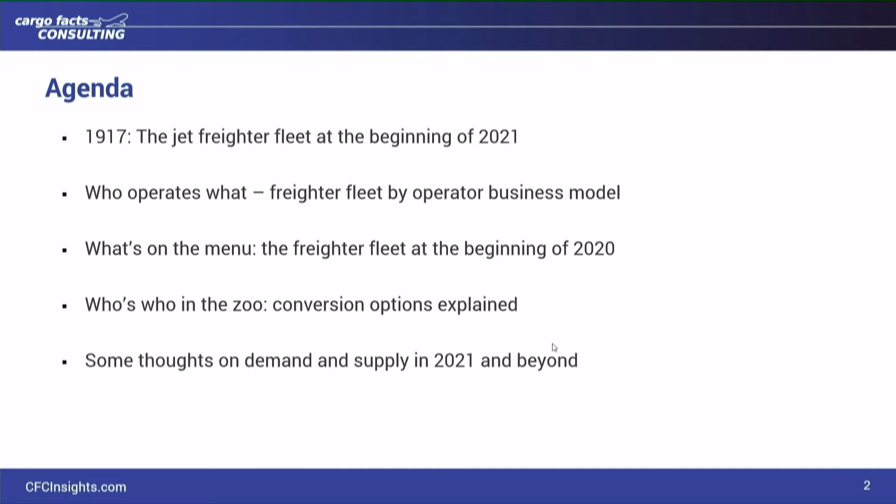Availability of freighters, so welcome everyone. I'd like to talk about a few things today. First, give you a rundown of where we stand with the jet freighter fleet at the beginning of 2021. 1917 is the magic number of aircraft in service, at least by our count. Then looking at who operates what in which segments, because this is quite key with regard to the whole demand-supply balance issue. Then, what's on the menu, the freighter fleet choices we have going forward. Who's who in the zoo, conversion options explained, and some thoughts on demand and supply in 2021 and beyond.

In 2020, the total active narrow-body fleet grew by about 5%, while the medium wide-body fleet grew by about 4%. Large wide bodies, by our count, grew about 3%. And we're in a situation where the number of retirements for a number of years now is at a historical low, and the parked fleet is also at a historical low.

So in the narrow body category, we count about 710 aircraft. The biggest change there is that we're seeing more 737 NGs come onto the market. We've seen some extra classic deliveries, extra 757 deliveries, and starting to see some retirements of other types, and also some more MD-80s in there as well. On the medium wide body side, really the biggest growth has been on the 767 side.

Both in factory-built freighters, mainly going to FedEx and UPS, as well as in conversions going to ATSG, Amazon and co. On the large wide body side, the big changes have been extra 777 deliveries and a bit of a trickle of a few extra 747-8s.

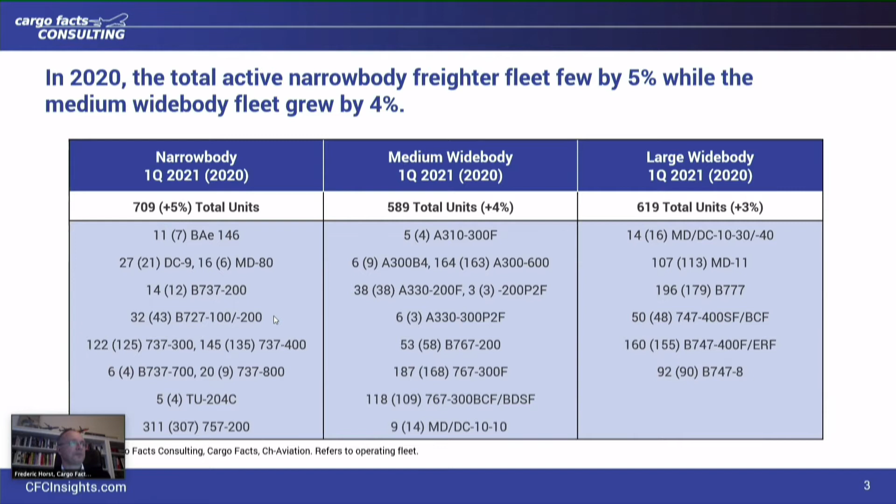Within each one of the segments, and I include the feeder segment here as well, ATRs and so on, but the focus of this is going to be mainly on the jet segment. What we see in the narrow body and the medium wide body segment, most of the fleet is either operating for or is operated by integrated carriers. In the large wide body segment, which is the home of most of the intercontinental freighter fleet, it's much more diverse. We've got combination carriers, scheduled all-cargo carriers, ACMI specialist carriers operating for integrators but also for others, and the express operators themselves. This is quite key when we think about the demand dynamics in each of these segments, particularly the narrow body, medium wide body, and feeder segment.

Traditionally, we've only got a handful of customers in there. So FedEx, UPS, DHL, increasingly Amazon, SF Express, and a number of other smaller express operators and postal operators in there.

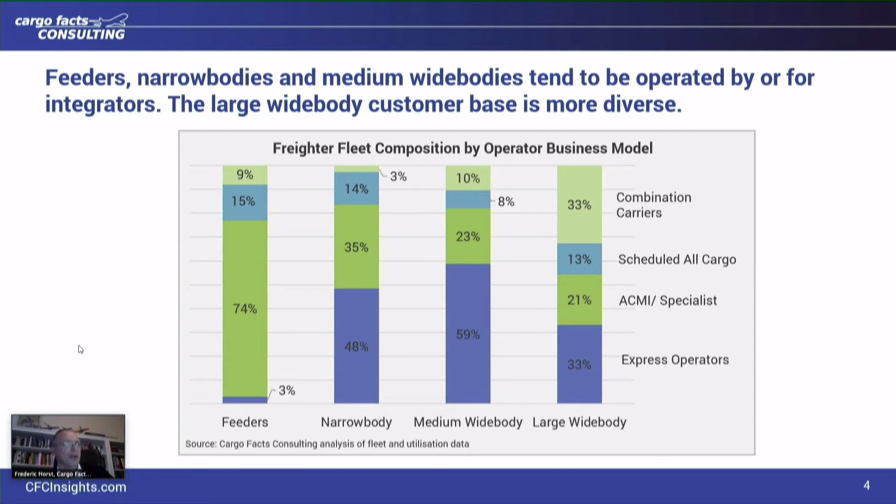So the freighter decision tree. If you're out for a freighter, unfortunately the used car lot is pretty empty unless you want a DC-10 or an L1011 or want to reactivate something like that. And everybody wants a freighter at the moment.

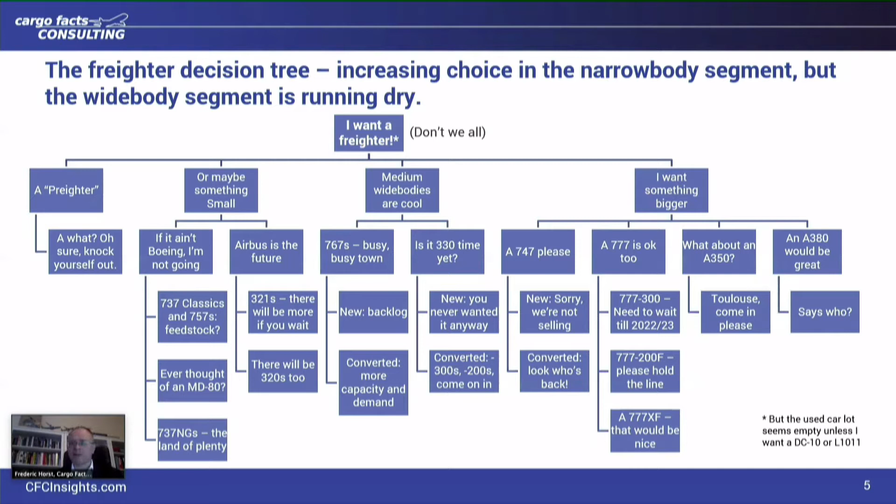2020 brought us a new type of freighter, the Preighter. A what? Well, a passenger aircraft that's operating as a freighter, and we've seen a number of airlines, traditionally freighter haters, without any freighters, starting to operate passenger freighters. Everybody seems to be doing it. I haven't quite figured out the economics, but...

What I do know is that if someone else is paying the costs, be it the aircraft expenses or lease expenses, then these aircraft can make a decent amount of money. Particularly in the peak of the pandemic, where rates were sky high, it was actually possible to make some money with passenger freighters. That being said, there's still quite a few in operation on a lot of major lanes. We see anywhere between 150 and 200 flights a week that are operating on passenger freighters at the moment. But if you want one, sure, go ahead, knock yourself out.

Maybe you want something smaller. And there, the choice is really, is it Boeing or is it Airbus? Well, if your choice is, if it ain't Boeing, I'm not going, you can go for 737 Classics and 757s. Not a lot of feedstock left. Maybe 1 or 2 years left in terms of feedstock for those programs.

Have you ever thought of getting an MD-80? Traditionally, I thought the only MD-80 customers were going to be the likes of Everts and Aeronaves and USA Jet that are replacing their old DC-9s, but with feedstock close to zero on those aircraft and a pretty reasonable conversion cost, all up just north of 3 million can get you a freighter on the ramp. So that can be quite an attractive proposition, and I'm sure Bob will talk a bit more about that after.

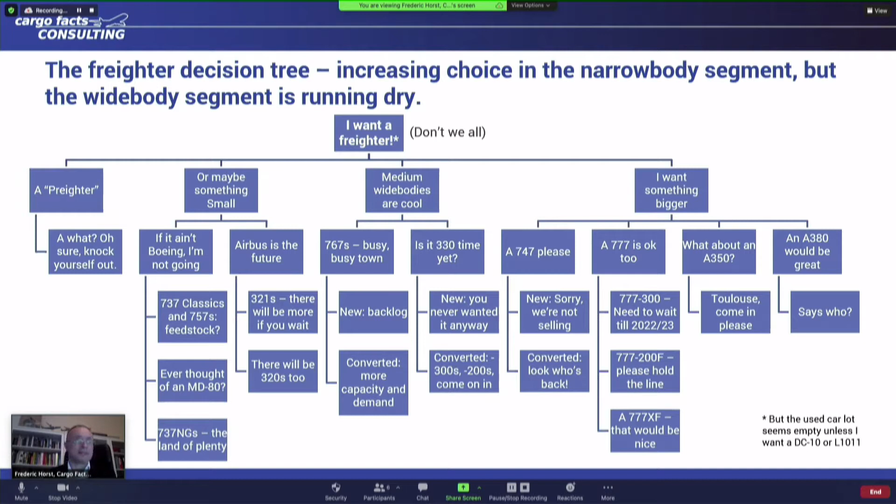So this is, to get a bit more serious, this is an overview of the current and planned conversion options. What we are seeing is that there is a lot of choice in the narrow body segment, but the STC approval dates seem to keep shifting to the right on Airbus narrow body programs. So we've got options on the classics with AEI, IAI, and PEMCO, and also on the 757 with ST and Precision. And we've got some new A320, 321 options emerging.

The only current STC at the moment is the EFW one. The 321 Precision one shouldn't be too far behind, and it's a bit of a question what's going to happen with Sine Draco and C3. On the 767, we've got the choice between Boeing and IAI. On the 330, the choice is currently only EFW, but IAI is obviously planning a program there as well.

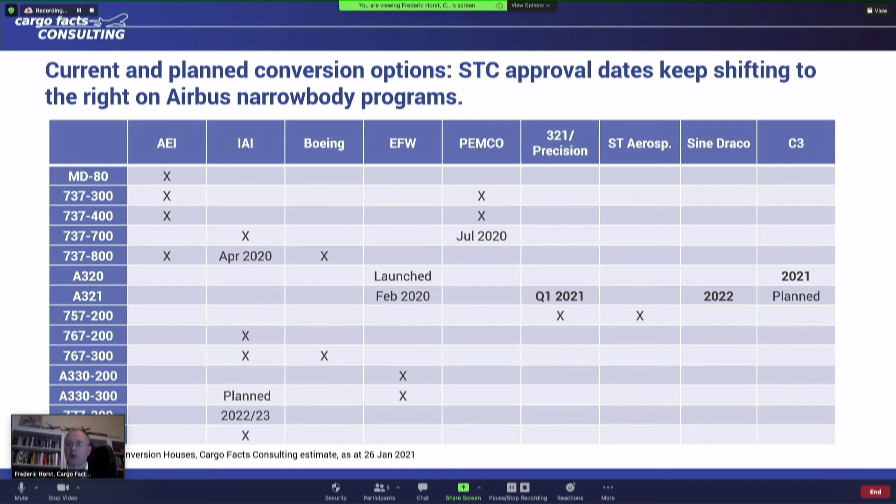The first new large wide-body conversion program will be for the 777-300 ER, expected to receive its STC in 2022, 2023, around that time. And funnily enough, we're seeing a few stragglers on the 747-400 program there, although the last redeliveries were a few years back on that. So the key questions, and this is my last slide.

The key questions going into 2021, in our view, and beyond for that matter, is really this whole demand-supply imbalance. On the narrow body and medium wide body side, the question is whether the underlying demand for freighters has actually been brought forward by a surge in express and e-commerce demand in 2020, or are we going to fall off the cliff? And in that context, are asset owners, particularly leasing companies, getting over eager with regard to the 737-800 and even the 767 without the underlying medium-term market demand to support this?

The other question is: is there too much supply overall in the market, and who's at most risk of getting burned? Airlines, lessors, or conversion houses? On the large wide-body side, the key question there is how long will the gap between large wide-body supply and demand persist? And that's really a question of how quickly will passenger traffic come back and belly capacity, and how quickly will world trade reach normal levels.

All right, thank you.

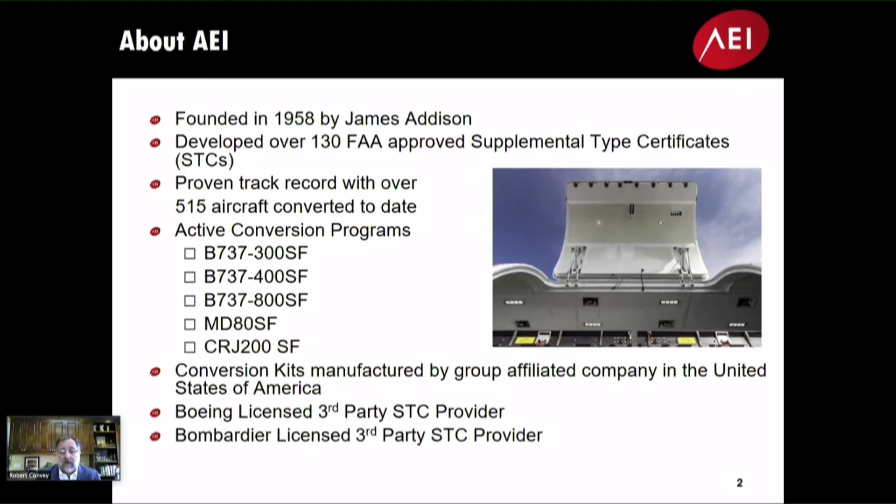AEI, we manufacture our own kits, and I will touch on this because this is becoming an issue. We are seeing, the longer this pandemic continues, an impact on our production. So it's affecting odd things - castings, extrusions - at different times. Sometimes they come back in and they catch up. Other times they're permanently disabled. Companies like Ancra, who provide our cargo handling system, are seeing greater and greater lead times. And again, they're being affected by their suppliers with castings, extrusions, machining. And I'll touch again, we are a Boeing licensed and actually a Bombardier/Mitsubishi licensed provider for the CRJ.

Just kind of a quick timeline, a little bit of a history lesson. We've been around so long that we've converted some very unusual aircraft, unique aircraft. I will say probably one of our success stories is Everts Air up in Fairbanks, who flies our DC-6 freighter currently.

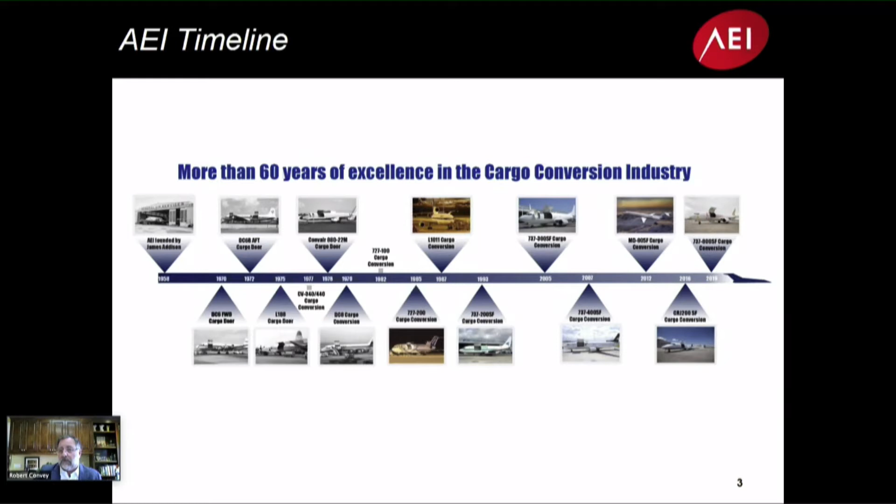They fly several of them, and they're also now flying our MD-80 freighter, again 5 or 6 of them as well. So they're flying the 2 freighters side by side with about a 30-year span between conversion starts, which is quite unique. It starts at the early days of the DC-6 and ends with the 737-800, which is our current product. We'll go into a little more detail about what we're seeing in terms of demand there.

Here's a quick snapshot of converted aircraft. This is about 420 some odd aircraft out of the 515, but it gives you a good example of where we've been in the past. So the 727-100 and 200s, of course, set the foundation for the integrator express market, mainly with FedEx in the early days. 400 plus airplanes, and we did about 2/3 of those aircraft conversions.

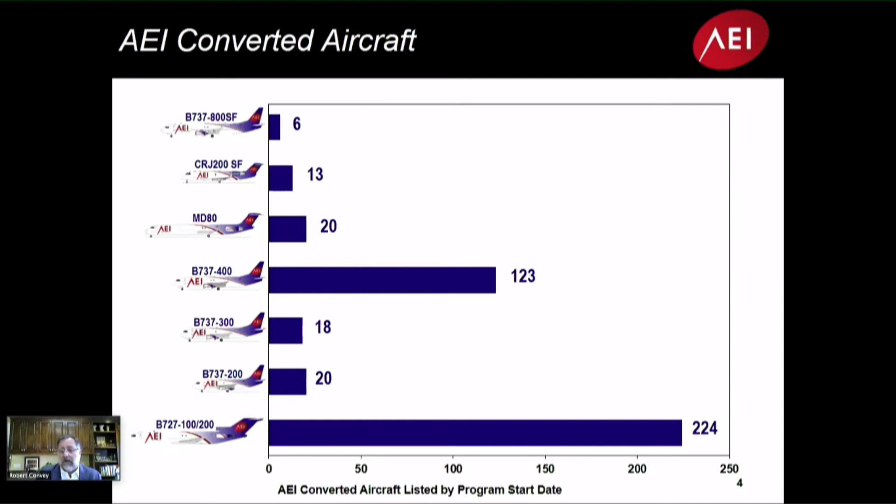We think the 734 had a good chance of getting up there, but it just ran out of feedstock - there simply weren't enough aircraft converted. But we do believe the 737-800, on the very top row, will eclipse by a factor of 3 or 4 what was converted, at least by AEI, for the 727-100 and 200s. We see that being an 800 to 1,000 conversion program amongst all suppliers over the next 20-30 years. So keep your eye on the 800 - I think that's going to be the benchmark and set the standard for the narrow body operators.

Frederick, you mentioned combination carriers on narrow bodies made up only 3%, and I think you're going to see that number change. We're dealing with 4 operators at the moment that are combination carriers, something we've not seen, at least in the 11 years I've been here. It's primarily been freighter-focused airlines. So keep your eye on the combination narrow-body freighter space - I think that's going to really start to pick up in the next few years.

And the question is, will it stay? Is this just a fad of people trying to protect their bottom line by adding freighters? Maybe they were burned on the passenger side and just didn't want that to happen again. Or are they going to find this a stable revenue source and we'll see them here for the long haul? Time will tell, but given the different carriers we're seeing, I'd say we're going to see a resurgence of combination carriers, at least on the narrow body side going forward.

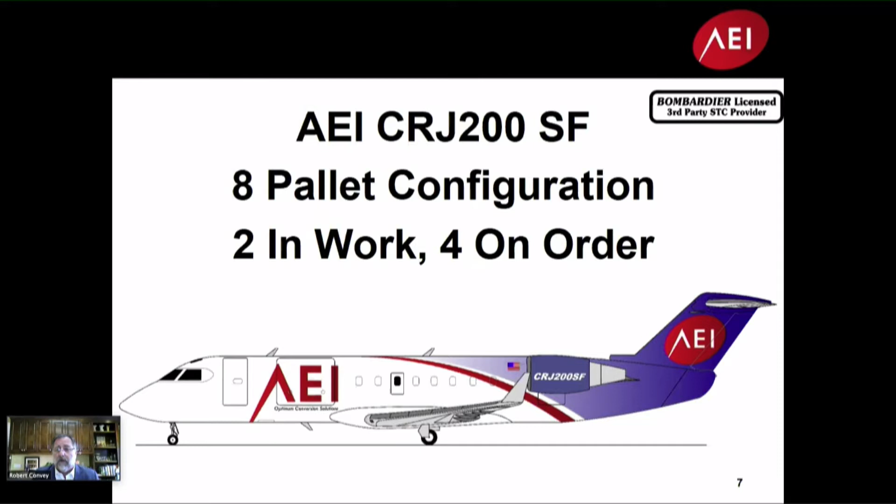Maybe to Frederick's point, we're seeing aircraft converted that maybe you wouldn't have converted a few years ago, but demand is so strong at the moment that people are starting to look at all options.

The 300 has an interesting story. We've never been a big player in the 300 - that was IAI and PEMCO that were extremely successful with that aircraft. This one is for Nauru Airlines. We've completed 1, this is the second one, just arrived, and it starts work next week.

But there was talk a few years back that when the 400s ran out of feedstock, we would see a run on 300 conversions, and that never really happened, either for PEMCO or AEI. I think that speaks to the need for more volume with larger aircraft, and we're seeing that play out. If you fast forward to the NGs, we're seeing that play out between the 700 and the 800. We're not seeing the demand for the 700 that some thought we would, but all that demand is going to the 800, which is obviously one more position than the 400 and more volume.

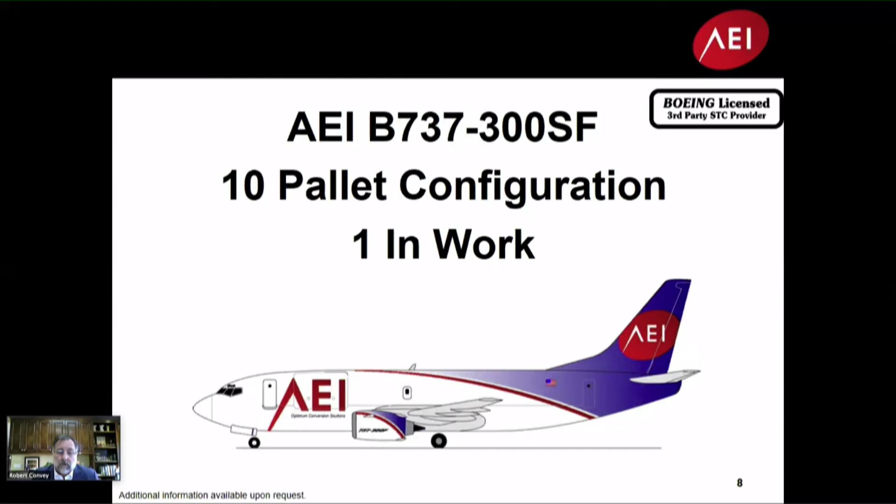So that's playing to the need for larger aircraft. Our 400 continues to be successful. If we had 200 more aircraft in feedstock, we would probably be converting 100 of them. So we have 4 in work at the moment. All of them now have homes. They have airlines to go to. There's 4 more on order that'll start work this year.

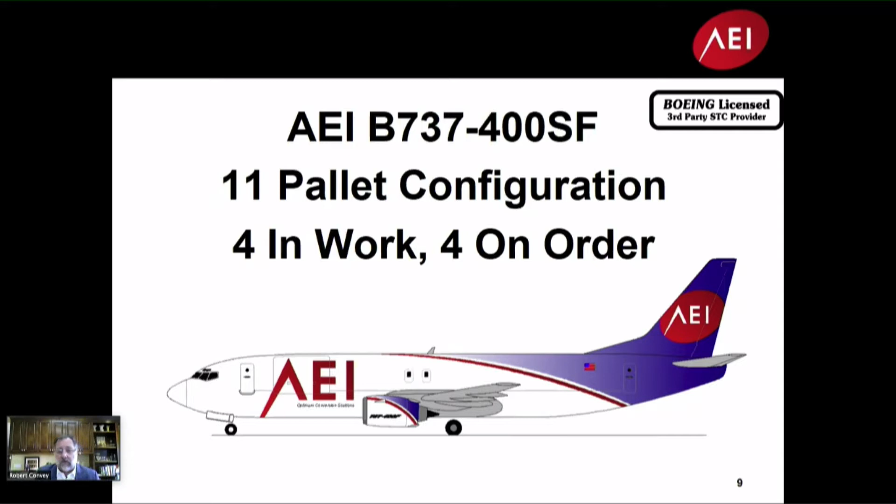Aeronaves TSM, who's been a CRJ and MD-80 consumer of ours, is now moved into a 400. March 1st is the first one, and they'll do about a half a dozen more. So we're looking for a large fleet from TSM on this. But again, it's one at a time. It's difficult to find them. Finding the right pedigree is challenging.

And then on to what's going to be our future, all of our futures, the 800. It's currently 6 in work. We have 32 on order. We'll deliver just shy of 30 this year. And then 28 options on that. And we're booked about a third of the way through on the 800s into 2022.

So again, really strong demand. The strong demand started for us anyway in May as feedstock values started to fall. I mean, it was very early days in May of 2020, but that was the challenge we were having in early 2020 and 2019 was a 20-year-old, $20 million 800. If you could find one, if you could get your hands on it, just didn't make an economical freighter. It was too expensive at the time.

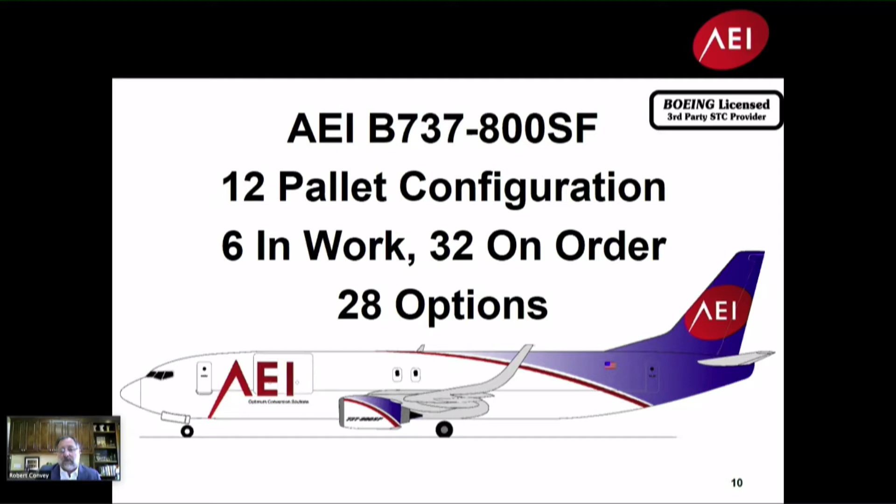We're seeing that same 20-year-old freighter trading for less than 10 million these days. So you're seeing a dramatic change. And I don't think that decreasing of prices will stop. I think you're going to continue to see that drop a little bit more, kind of end up between 8 and 10 million. That's where it needs to be for the operators, for narrow body investors, lessors that are looking to convert. It just keeps marching downhill, but that's one of the reasons you're seeing such large numbers in the conversion backlogs.

And then one of my favorite freighters, along with the 757 actually, is the MD-80. We continue to see orders for this. There's one in work at the moment. There's 7 on order. I think Everts starts another one February 1st. USA Jet starts one March 1st. And USA just recently purchased 40 plus MD-88s out of Delta. So we'll see what they end up doing with all those MD-88s. But it's a program that just keeps going on, and we're seeing kind of a renewed life in this aircraft, which is nice to see this far along, almost 10 years now in the program.

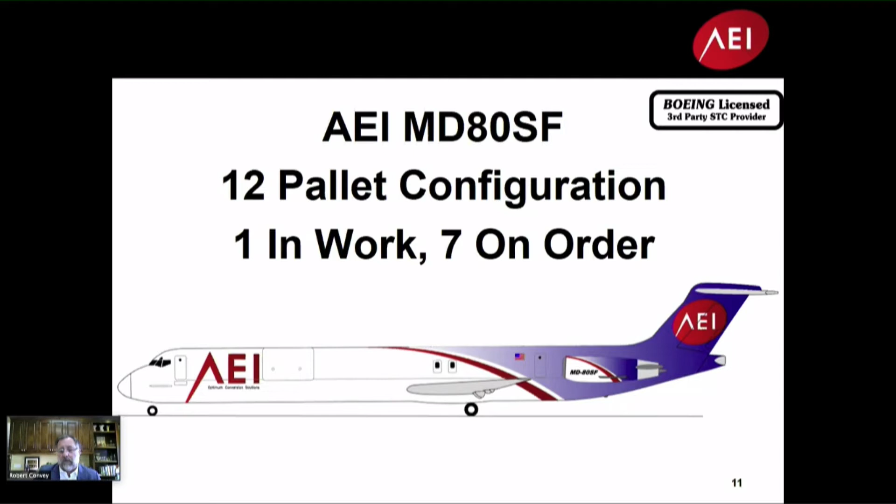So in 2020, we added as an industry globally about 125 new and converted freighters. My guess, AEI's estimate, is that number is going to grow to 150 plus, just based upon everybody's backlog and what we're seeing in terms of current demand, which is an incredibly large number.

What's driving that? Well, of course, the pandemic, which we just said May is whenever someone flipped the light switch on and we just saw incredible demand. But through the pandemic, that's being driven by people staying at home, ordering products online, e-commerce. We think this has been accelerated at least 4 or 5 years from its normal progression due to the pandemic. People are just ordering more at home, and I think that is going to be a shift change. I think people that maybe didn't order stuff years ago are now exposed to it, and a certain number of those consumers are going to continue ordering online, which is going to do nothing but help our industry.

In addition to that, aiding the growth is going to be the new entrants into the space. So the Sun Countries, JD.coms, there's a lot of new entrants coming into this space, and it's all being fueled again, as I said, by cheap feedstock. The prices of everything have come down just due to the number of grounded aircraft. And that's really feeding this frenzy, as I like to call it.

So the question is, if you go back up top, 150 freighters a year, new and converted, how long can we absorb this as an industry? That's a lot of aircraft. We're looking at least 2 years, and hopefully it trickles into the 3rd year, kind of at these 150 a year numbers. That's 450 airplanes. It's quite a lot to absorb.

As Bob alluded to, the freighter fleet grew quite a bit in 2020. By our estimates, and the numbers will still come in as the year closed out, on the order of 120 aircraft were added to the freighter fleet last year, and that's a really significant growth. It's a combination of new aircraft, converted aircraft, and also aircraft brought out of long-term storage. Several 747s as the year advanced, for example, were brought out of very long-term storage programs and put back into service because of demand on the freighter market.

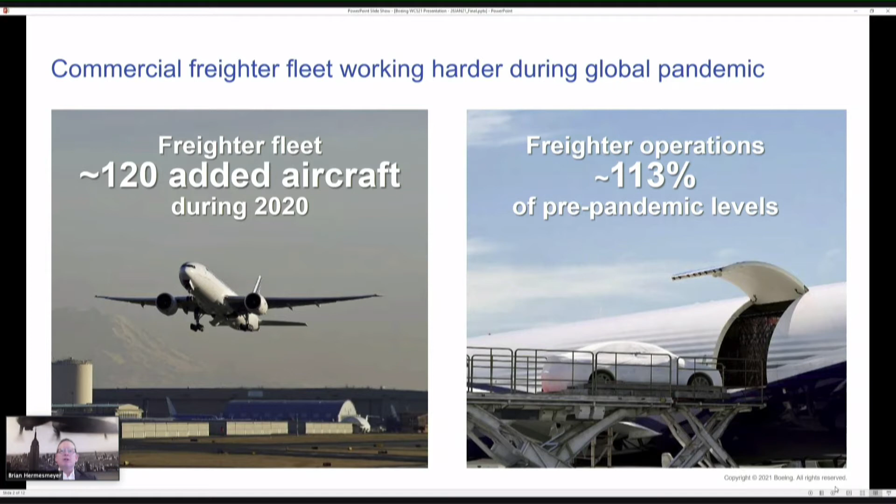Those operations, certainly those airplanes have been working really hard. At the end of the year, most recent data showed about 113% of pre-pandemic levels. We certainly have seen spikes higher than that through the course of the peak season we just came out of, and I'll talk a little bit about that in a moment. But clearly the world freighter fleet is working extremely hard.

As part of that, we've seen very strong market demand for our family of freighters, the most comprehensive family of freighters in the industry. Starting with the 737, we have over 156 orders and commitments for our 737-800 BCF program. And right behind that, we have the 767 BCF program now with over 76 orders and commitments.

As Bob alluded to, the space has gotten very busy in the last year. The market has been coming and looking for freighter conversion providers, and we have added capacity at the end of last year to help meet that market demand. We'll continue to examine that as the market moves forward and demand continues.

Not to be left out, of course, are our factory freighters. The 767 has really proven itself to be the choice for express carriers around the world with over 230 orders now. Strong fleets with major express carriers like DHL, UPS, FedEx, and emerging carriers in markets in China, carriers like SF Express committing to 767-300 BCFs, a great companion to the strong factory solution in the 767-300 freighter.

The 777 is really showing its versatility and its place in the market as the premier large wide-body twin-engine freighter. 242 orders to date as of December last year, more orders announced this year, and it has really shown that it can perform in both the general freight arena with its extremely good density and strong floor loading, as well as in the express markets, leveraging the aircraft's range.

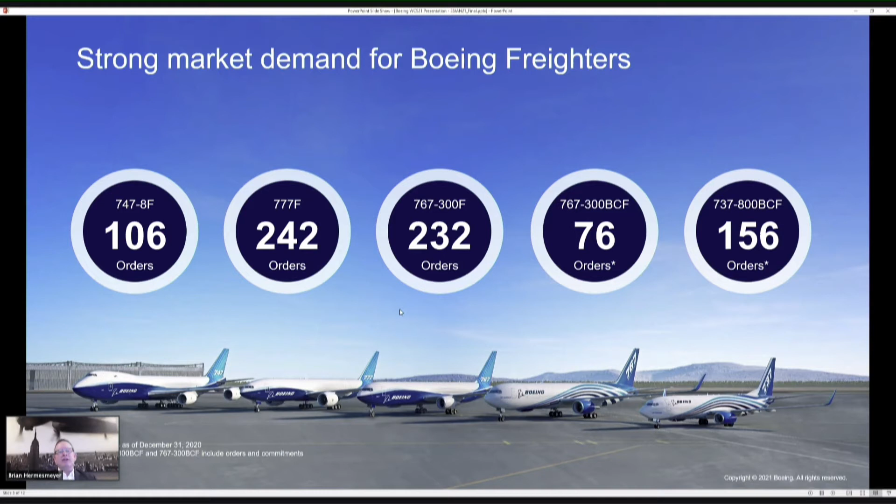Now, I talked about at the start how hard freighters are working, and I think this chart makes it very clear. Capacity has really been under a crunch since the start of the pandemic, and I think everybody has talked about that over the course of the year. It's fairly well understood that the absence of wide-body passenger belly lift has really put capacity in a difficult place for air cargo.

If you look to the right, at the end of fourth quarter last year, we're still at least 16% below the total global capacity that we had in the prior quarter from the prior year. Freighters are certainly shouldering the majority of the burden as all of this wide body belly lift has been sidelined because of the pandemic.

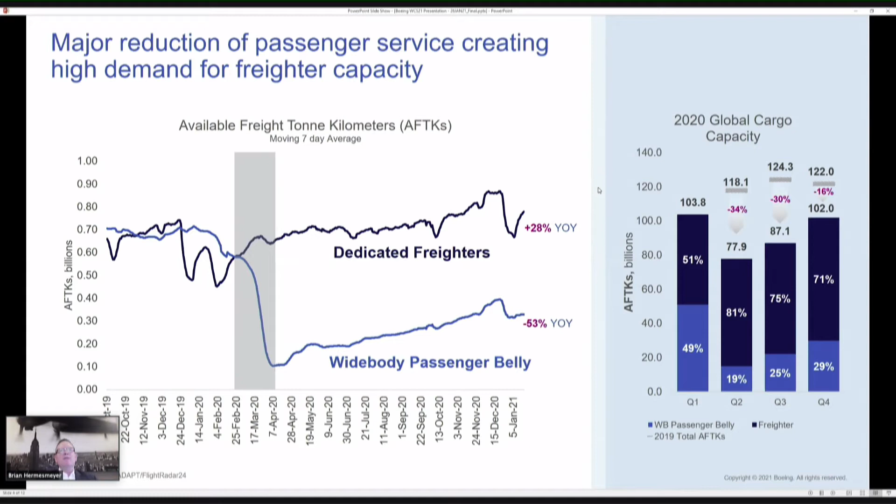Year on year, as we get into January, we're running about 28% AFTKs higher for the dedicated freighters. You see that there have been higher peaks than that as we've gone through the peak season. But as we'll explore later, I'm sure in the panel, wide body belly lift and when it comes back is certainly influencing the need for and the operation of dedicated freighters.

It's a little bit spread as to how carriers around the world by business model are seeing growth. Clearly, with the increase in e-commerce and home delivery shipments, a lot of B2C activity, as people can't get to traditional brick and mortar retail to buy their goods, we're seeing significant growth in the express carriers. All cargo carriers are seeing similar growth as we are more reliant on main deck freight to deliver goods around the world. Other carriers more reliant on passenger belly space are not seeing the same growth, simply because those large wide body aircraft are being parked as international travel is greatly curtailed by the pandemic.

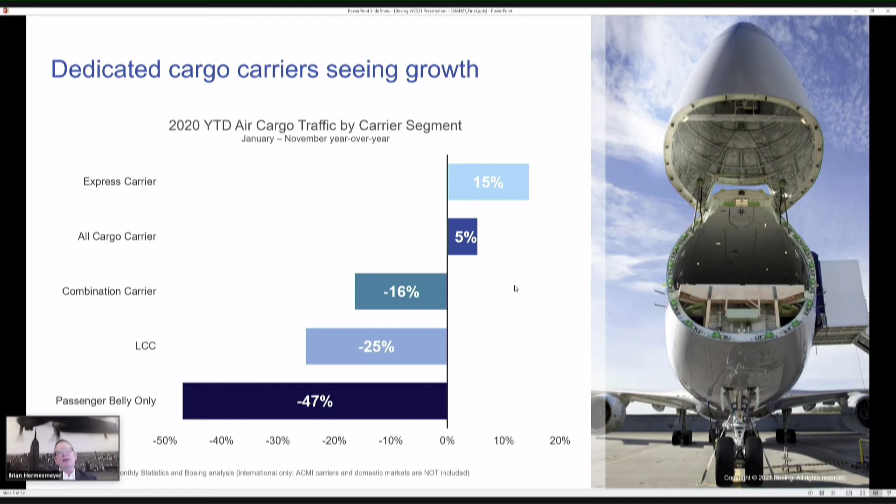It's always worth remembering the incredible role that freighters play in air cargo markets, with, in 2019 terms, $106 billion in air cargo revenue. Airlines operating freighters generate the overwhelming percentage of that revenue. Express carriers and combination carriers in a normal, non-pandemic time generate almost over three-quarters of air cargo revenue. Of course, this has been a challenge in 2020 as the express carriers have seen growth and the all-cargo carriers have also seen growth because of the lack of belly capacity.

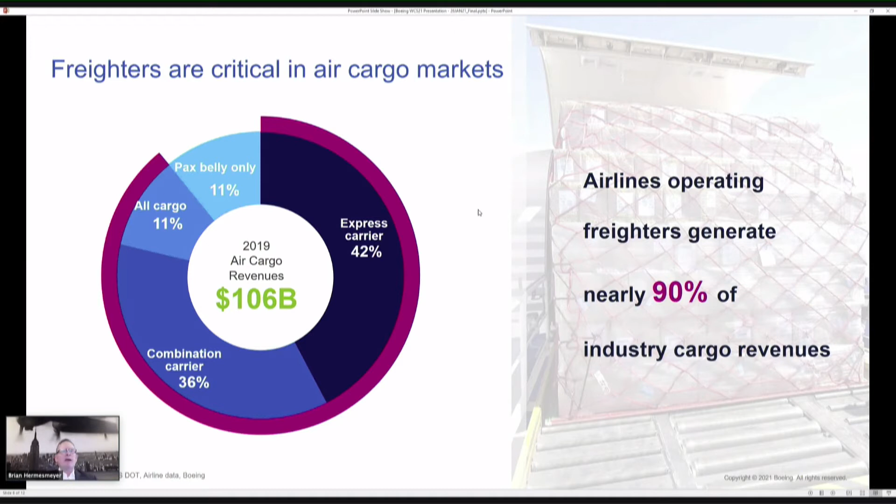Now, the big question everybody wants to find the answer to, and we all try to use our crystal balls to predict, is when is this going to recover? When will economic recovery come, and how is that going to affect air cargo capacity? Clearly, as we've talked about, it's tightly tied to available belly space, which in traditional times forms just under half of the capacity in the market.

So as we come out of the pandemic, air cargo capacity will track as passenger recovery happens and as economic recovery happens. It'll probably lag just a little bit. As you see in the data here from Oxford Economics and IATA, getting back to 2019 levels should come somewhere around the 2023, perhaps 2024 timeframe.

The underlying drivers of the need for air cargo—industrial production, trade, GDP—are all trending positive a little bit sooner. We've seen a really strong return in trade as China has gotten back to business throughout the pandemic. So as passenger traffic recovers, so will air cargo capacity, and you can see how this tracks very closely with predictions for air passenger or passenger market recovery.

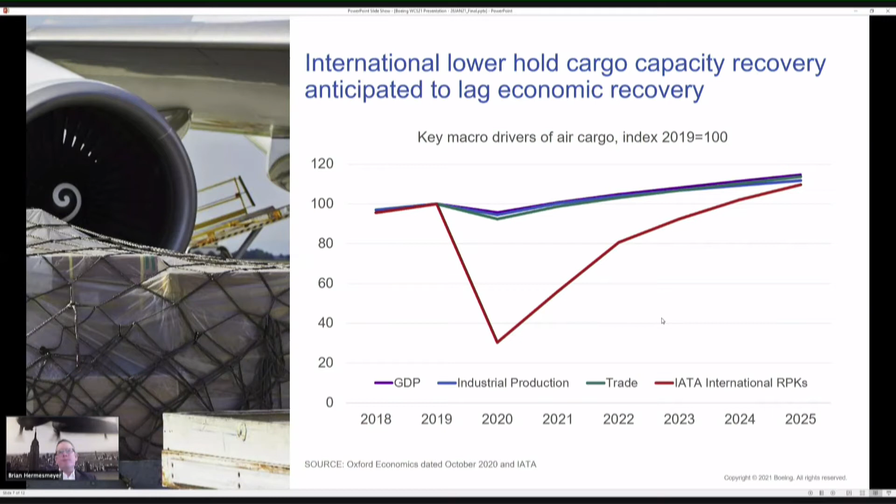When we look further out at the 20-year forecast that we do biennially with our World Air Cargo Forecast, my colleague Tom Crabtree is key in publishing that document. Strong underlying numbers will continue to drive cargo traffic, and over the 20-year forecast period we see that continuing at

a rate of 4%. The freighter fleet will continue to grow. Trade growth will continue to occur, and industrial production will continue to grow too. So the underlying drivers that create traffic will all remain strong over the 20 years, and as a result, we will need a lot more freighters.

At the end of 2019, the freighter fleet stood at a little over 2,000 units. But over the course of this forecast period, 2019 through 2039, we see the fleet growing by over 60%, with over 2,400 deliveries necessary to get us to an ultimate fleet of around 3,260 units.

You see a large number of standard body conversions. Bob has spoken about the strength he's seen in his business, and we certainly are seeing strength in that space as well. Over 20 years, we expect to see over 1,000 units required for the standard body space.

Of course, there are no factory-built solutions for standard bodies—all of these come from conversions. Medium wide bodies will be a mix of converted and new units, depending upon the business model and individual carrier needs, and we expect 450 new large wide bodies.

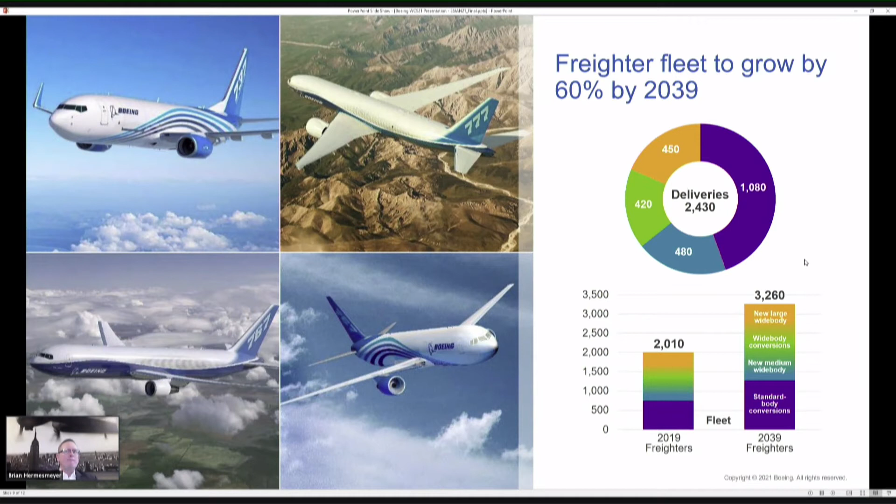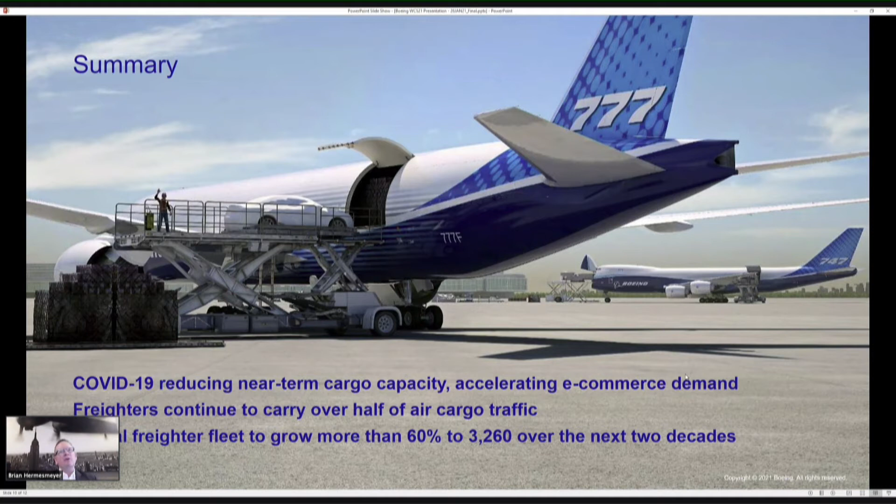So just to summarize, COVID-19 has certainly reduced near-term capacity, and we have seen an acceleration in e-commerce demand as people have been forced to purchase things through e-commerce channels as opposed to being able to go to the stores. Freighters continue to carry over half of the air cargo traffic and are working extremely hard through the course of the pandemic, and we do see continued strong growth over the next 20 years in the freighter space.

If you'd like to explore that a little bit further, I recommend taking a look at our World Air Cargo Forecast. It was released at the end of last year in November.

A lot of great information and insight into not just air cargo aircraft themselves, but the markets and how we see the markets evolving over the next 20 years. And with that, I will hand it back to Tom, and we will get into our panel questions.

Tom? Brian, thank you very much. That was a really good overview as well, and added a little more color and detail to the data that Frederick and Bob shared earlier. It's my great pleasure to introduce my good friend, Rafi Mataion, VP and General Manager Marketing at IAI Aviation Group, who joins us from Israel tonight. Rafi, the floor is yours.

Hi, Tom, thank you very much. I apologize for my delay, there was some misunderstanding, but finally I'm here with you, and this is important. Thank you very much for the opportunity to be part of this panel and to continue our legacy panels and discussion regarding IAI conversions. So with your permission, I have some slides, I will do it very shortly to present about our capabilities, and then we can go to the questions.

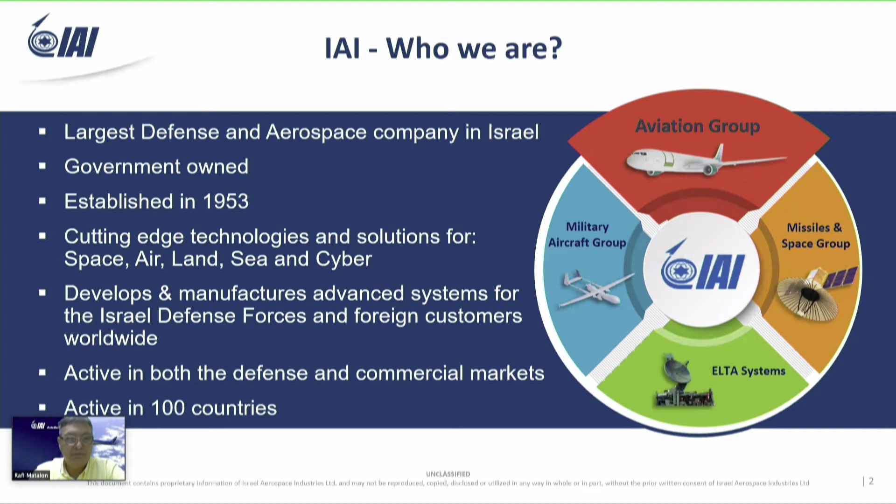So I mentioned we're around 15,000 employees. We are spread all around the world. Our sales in 2019 were around $4 billion, and we have a future backlog of $13 billion. Our major facility is close, in Ben Gurion Airport, and around the country.

I would like to share with you a slogan of our EVP, Mr. Yossi Melamed, that he's taken with him, and day by day he's talking about this: a salute to those who dream and those who dare. And you will see that in aviation group we are doing four business lines. I will talk right now - one of them is conversion, but we also manufacture the jet business. We're doing conversion, innovation, MRO, and etc.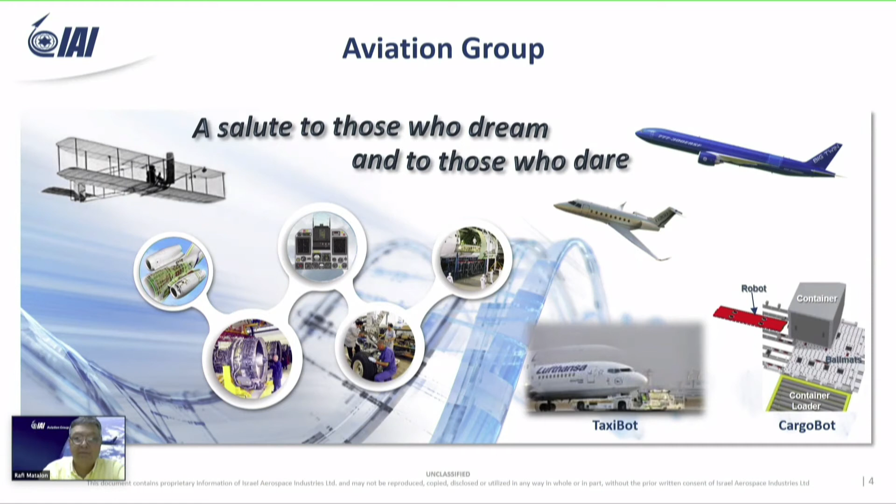So actually, in aviation group, and I'm in charge of marketing for this organization, we have 4 business lines. The first one is Bedek MRO. For the last 60 years we've been leading in MRO, a one-stop shop. We have in-house all facilities and capabilities for engine overhaul, components, and airframe, for all the family of Boeing and Airbus.

The second one is the aircraft business line, where we manufacture the jet business - this is the G280. We have the Lahav aerostructure, where we manufacture aerostructure for commercial subcontract to Boeing, Airbus, composite material, and some military aerostructure like the wings of the F-35, F-16, cockpit of F-15, etc. Conversion and upgrades is the business line where we develop all our STCs, the conversions, and do some military upgrades for helicopters and jet fighters. In our group we have the biggest engineering division, more than 1,500 engineers who have the capability to design an aircraft from scratch to final certification, and everything we can do in-house.

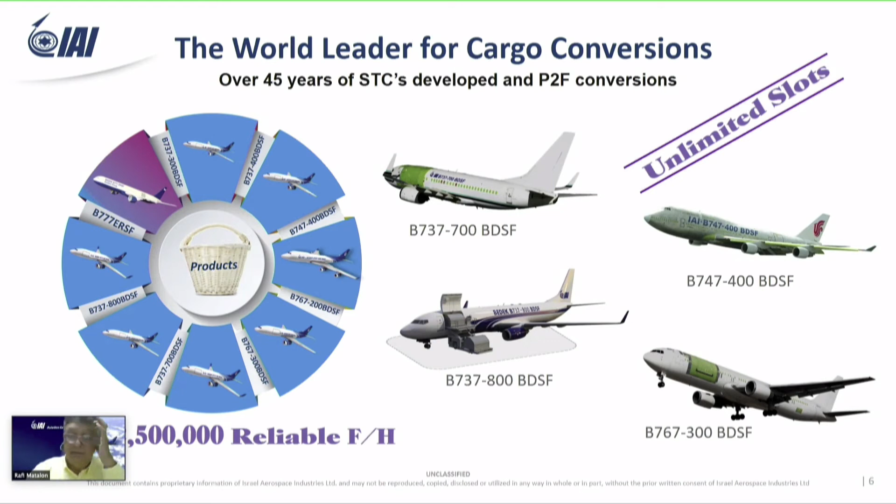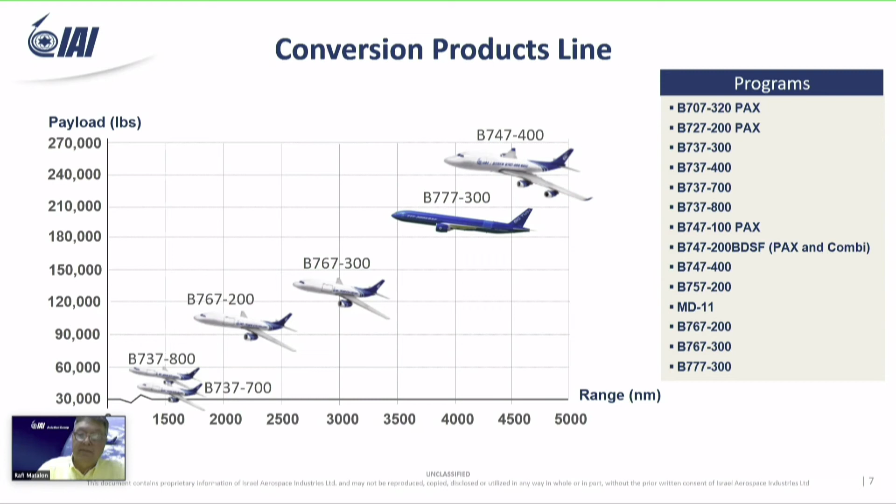So to summarize this business line of conversion, as the leading house of P2F conversion, we provide a premium product, professional and reliable. And we believe, based on this, that we are an OEM of the G280, the Gulfstream, which brings us special methods for doing the conversion, different from our competitors, which brings a lot of advantage to the operator.

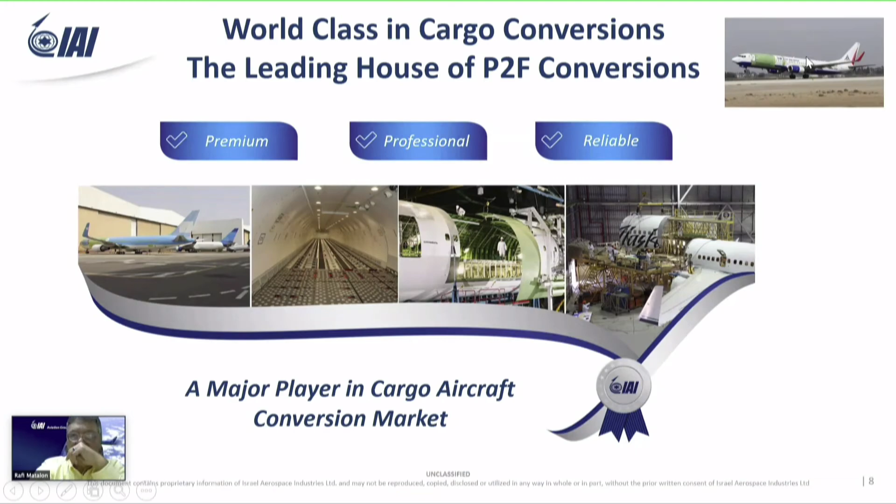Hold on for a minute. Wow. I will try to show you a very short clip.

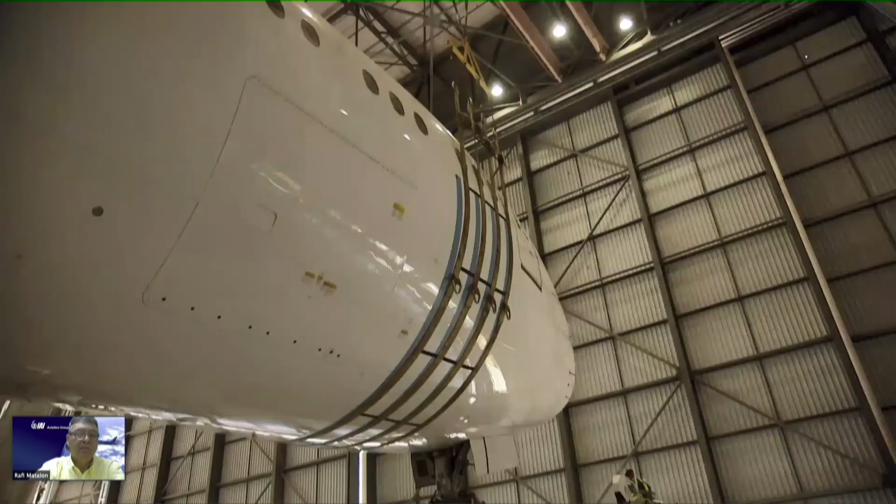So thank you very much for the patience, I appreciate it very much. Thank you.

Rafi, thank you for the overview and the short video clip of IAI's achievements in the freighter conversion business. We've got a little less than 6 minutes to do a Q&A to conclude on time. Bob, you already answered the first of my questions. Basically, we've seen a grounding of much of the world's passenger capacity, and freighters have had to step into the breach. In normal times, like 2019, there were 26,000 jet transports in the world flying around, but only 2,000 of those are freighters, as Brian pointed out. The question is, as Bob kind of posed, are we heading for an oversupply situation?

And Bob kind of answered his own question - he's going to see growth for 2 to 3 years. Frederick, I'm going to throw the question back at you: how long will this go on? Is freighter demand outstripping supply?

If I look at the first 5 years of our forecast, we were assuming about 48 narrow body deliveries a year for the next 5 years, which is kind of what we had last year, and about 27 or so retirements. So we haven't seen a lot of retirements at the moment, so there's a bit of a safety valve in there in the business.